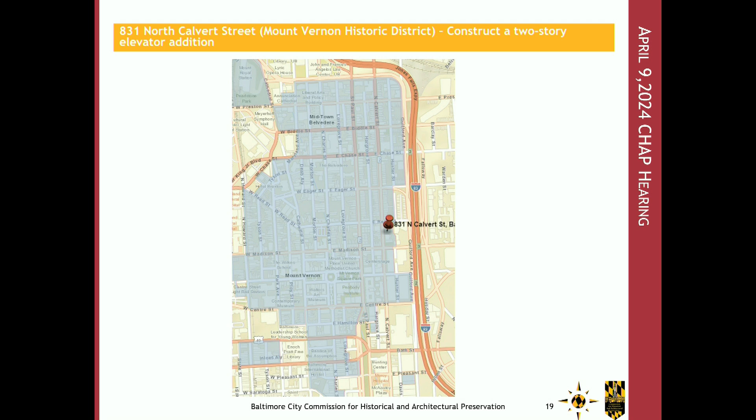This property is located in the Mount Vernon Historic District, which encompasses 40 blocks surrounding Mount Vernon Place. The period of significance for Mount Vernon Historic District extends from 1810 to 1945. The property is situated on the southeast corner of the intersection of Calvert and Read Street. It is a two-story firehouse which was constructed in 1908 for the Baltimore City Engine Company 16.

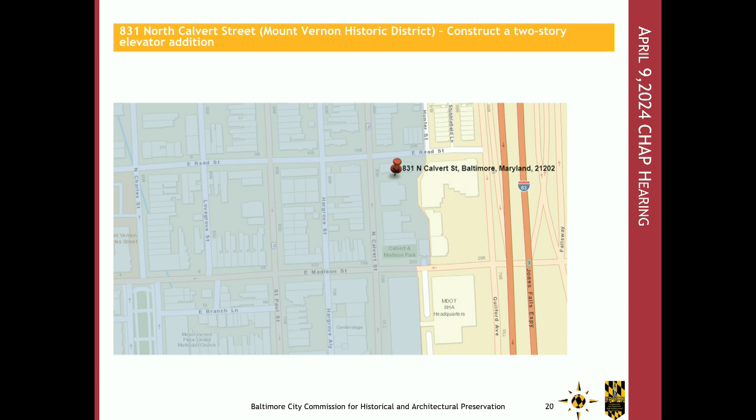Here are some aerial views from the west, south, the rear of the building, and north.

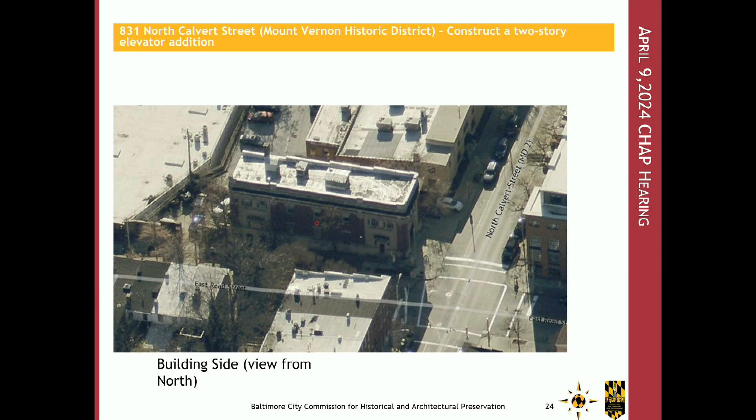The Calvert Street facade is a single bay with a large arch doorway which opens up to Calvert Street, surrounded by keystone molding which rises from the stone belt courses atop the stone foundation. On either side of the entry are massive two-story brick pilasters rising to a stone entablature. The second story houses three double-hung one-over-one windows resting at a single-story sill. An elaborate hooked ladder carving partially fills the space extending up from the keystone.

The south and east elevations are utilitarian with brick running bond on the south elevation. There is a two-story stairwell clad in EIFS, as you'll see in further pictures, with a curtain wall on the west elevation that faces North Calvert Street.

The stairwell is approximately 8 feet shorter than the firehouse and is set back from the facade of the firehouse about 30 feet. A mature tree is in front of the stairwell, which decreases the visibility of the stairwell.

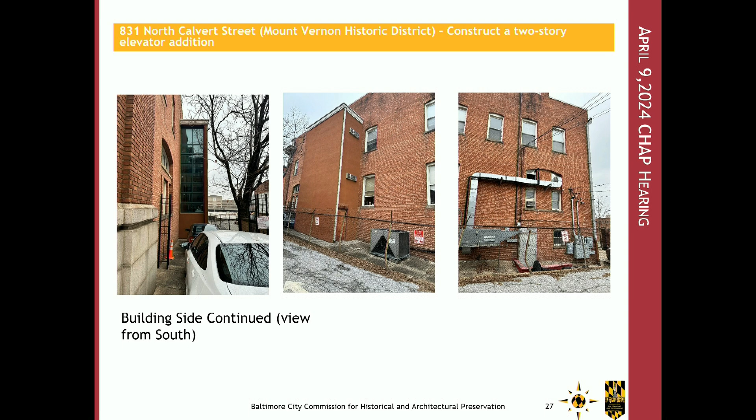The Read Street facade spans 5 bays. It's also a highly ornate facade. The end bays replicate the North Calvert Street elevation, but with less detailing. The middle 3 bays feature window openings on the first and second floor.

A little background: this property has undergone several reviews by CHAP staff and 2 reviews by the commission for various exterior work, including window and door replacement and mechanical work. Pertinent to this review, in April 2001 the commission gave concept approval of the exterior stairwell on the south side of the building, with colors and materials to be reviewed and approved by CHAP staff. However, there is no record of the final staff review, nor are there records in CHAP files or the permit system regarding the construction of the new stairwell or the EIFS currently present on the exterior.

The applicant proposes to construct an elevator shaft on the south elevation of the building. This elevator will enhance the accessibility of the existing 2-story building for occupants and visitors. The proposal is to construct the addition adjacent to the existing stairwell on the south elevation, built closer to the primary elevation of North Calvert Street.

The applicant explored constructing the addition on the other side of the stairwell towards the rear of the property, but doing so would significantly impact the circulation and remove several dining tables in the area on the interior.

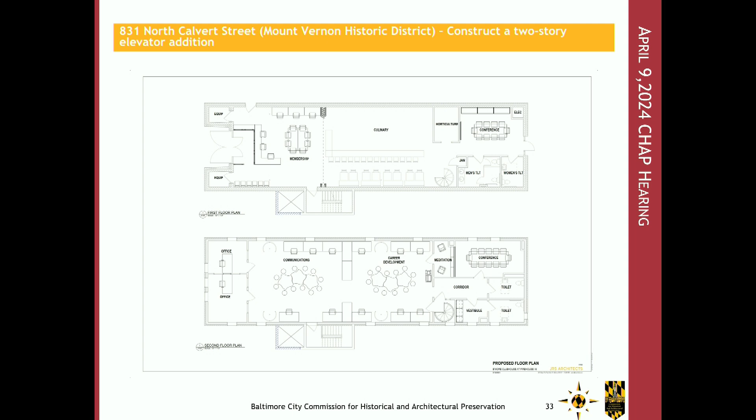The 2-story shaft will have a footprint of approximately 6 by 7 feet and will extend a few feet higher than the existing stairwell. The elevator shaft will be positioned on the side of the building adjacent to the existing stairwell, with a 6 3/4 inch inset from the original stairwell to accommodate the downspout that will empty onto North Calvert Street.

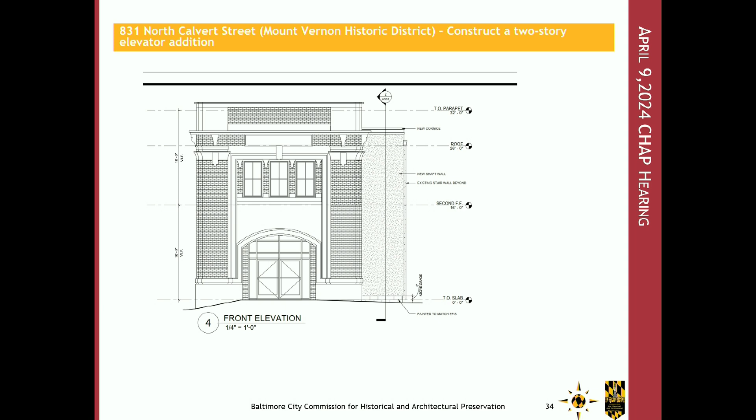The proposed elevator shaft will be concrete block clad in EIFS to match the cladding on the adjacent stairwell. There will be no windows on the new elevator shaft. It will be set back from the facade of the building by 24 feet, and it will have an EIFS cornice that replicates the existing simple wood cornice on the stairwell.

This is the proposed location of the elevator shaft. It's going to go in front of the current stairwell, and the windows and everything currently on the stairwell will be demolished.

Application of the guidelines: staff incorporated guideline 1.15, accessibility. The proposal meets the goal of providing barrier-free access to the upper floors of the historic building.

However, as currently proposed, the elevator addition isn't fully compatible with the historic character of the building in materials and detailing. While the guidelines recommend landscaping to screen elevators, in this case the construction of the elevator addition may necessitate the removal of a mature tree that currently serves as a visual shield for the existing stairwell. If the tree cannot be saved, the applicant will be advised to explore other landscape options.

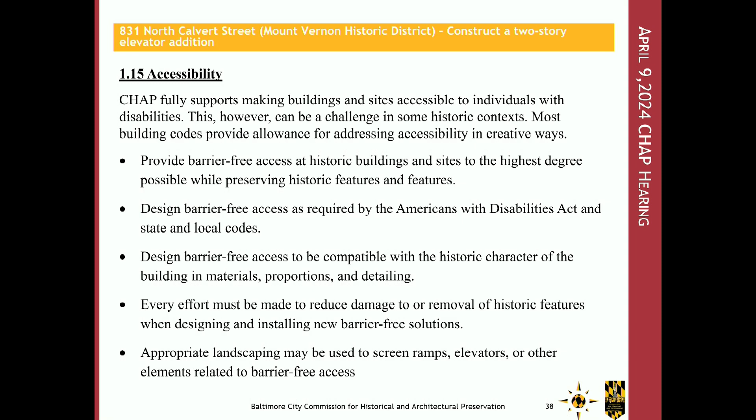Guideline 1.17, alterations and additions.

Excuse me one moment. Sweater—it's hot.

The proposed elevator addition largely meets this guideline, as it has a modest footprint and will be located on a secondary elevation.

This is a utilitarian elevator shaft lacking fenestration. The addition will be visible from the primary elevation, as it is set back only 24 feet from the primary elevation. It's largely compatible with the historic firehouse in massing, height, form, and scale, but would better comply with the design guidelines if it matched the width of the exterior stair tower. While the height of the elevator addition is not perfectly aligned with the cornice of the firehouse, this discrepancy likely won't be noticed given the setback.

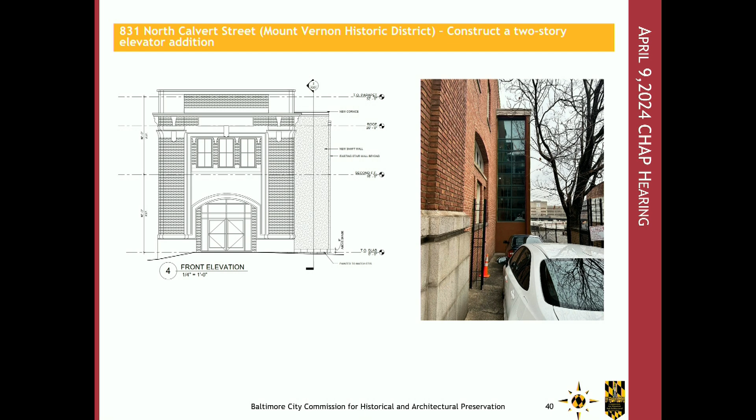Staff also applied guideline 2.1. The proposed addition could better meet the guidelines by adding some additional fenestration that visually relates to the firehouse, such as a cast stone base and a cornice that matches the height of the firehouse's cornice. Though it can be simple in design, the goal of adding these details is to break up the massing of the two-story addition by giving it a base, middle, and top, like the firehouse.

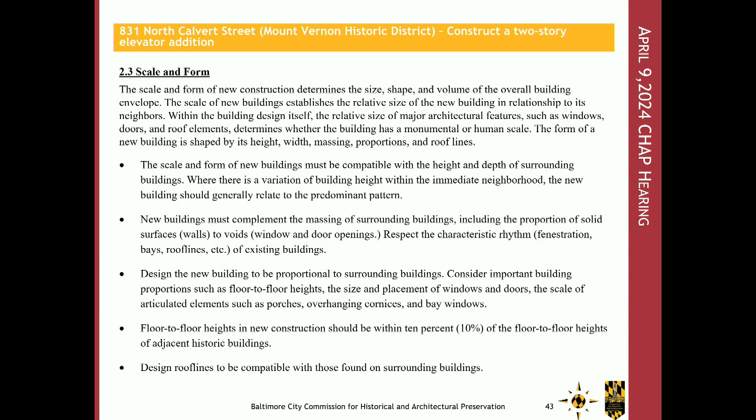2.3. The addition largely meets these guidelines as the scale and form of the new elevator shaft is subservient to the main building. It will better comply with the guidelines if it matched the width of the existing stair tower and if the cornice lengthened to be more with scale with the firehouse.

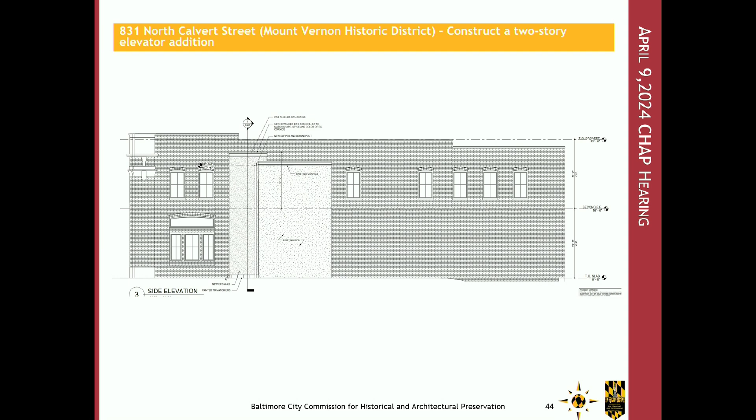2.5 materials. The proposed EIFS cladding does not comply with design guidelines. While the existing stairwell is clad with EIFS, there is no record of CHAP approval of this material. Additionally, it was constructed 20 years ago prior to the adoption of CHAP's current design guidelines. EIFS is not a traditional material within the historic district, and the use of it on an addition that fronts a primary elevation could detract from the overall historical character of the district.

Brick is the dominant material on this firehouse and in the neighborhood at large. Given the visibility of the proposed addition on North Calvert Street, staff recommends the addition should be clad with brick.

So, neighborhood comments. The ARC and the MVBA were presented with materials and plans, and their letter was uploaded to the Wix site, which I received yesterday.

So the analysis: the location, scale, and massing of the proposed addition is largely compatible with the design guidelines, though staff believes there are some necessary updates for it to fully be compatible. First, the addition should be widened to match the width of the adjacent stairwell as proposed, and the cladding and detailing of this utilitarian addition does not comply with the guidelines. The addition is visible from North Calvert Street, and thus requires more compatibility with the primary facade of the firehouse. This addition would better comply with CHAP guidelines.

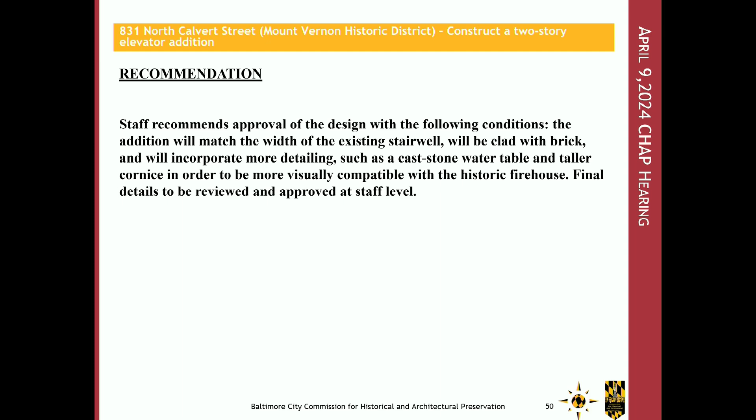Peter Bosworth. Yeah, I guess the three of us are together. Okay.

Hi, I'm Peter Bosworth, and I have listed myself as the applicant, but the real applicant is our nonprofit, Be More Clubhouse. I'm a volunteer there and on the board, so I put my name down so Anthony and I could talk over the last couple of months without confusion about where email or communication should go. Be More Clubhouse is a nonprofit that's been in the city about 15 years, and our mission is to help mentally ill adults.

We run a day program, meaning we're open from essentially 8:30 to 5, and we usually have 40-odd mentally ill adults in our program every day, plus staff. We've been operating in this building for about 3 years. We've been looking for a home in Mount Vernon really ever since we started 15 years ago.

We've always moved into sort of pretty bad locations, I'd have to say. We're a shoestring, bootstrap organization, and it takes a lot of volunteers like me and others to keep it going every year. We were lucky enough during COVID and some of the economic hardships to be able, with the help of M&T Bank, to purchase this building, which was in foreclosure. And we've been very happy there. Our members have been very happy there.

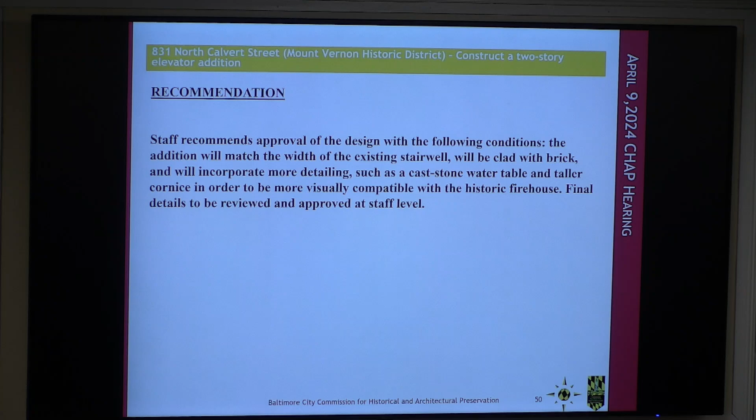Is there anyone else presenting for the owner? Unless there are questions for the program manager, I'm Al Barry, and I was helping Be More Clubhouse become established, initially in one location in Mount Vernon, which didn't work out because of cost. Then we found this building, which was perfect, and it's been a great addition, we think, to the neighborhood.

When we talked to the neighborhood, I haven't seen their letter, frankly. They did email us with some ideas, and we had some conversations, but as I understand it today, staff is generally in approval, but they're recommending brick versus EIFS, and because their guidelines don't recommend EIFS, we're before you.

We would ask you to approve our material based on the conditions at the site. We believe we can absolutely meet the guidelines, many of which staff has agreed to as well, and take into consideration that this is set back substantially from the street. It has existing landscaping, and your guidelines allow for additional landscaping if you would want us to do it. I think this is something we could work out with your consent with the staff.

Anthony's been very helpful. I think if you can approve the EIFS, we will add the water table, and we would propose it in brick, which makes sense. We can reduce the size of it or match the other one. But I agree that if you're going to look at adding something to an existing EIFS stairway, whether it was approved by CHAP or not, it's there, and it would be more jarring to introduce a third material there.

Are there any questions for Anna? Thank you. Thanks.

So I guess now, if commissioners have discussion regarding the proposal, I'll go first. So, a couple things.

In general, I'm not a fan of EIFS, but in this instance, I do think that introducing a third brick, no matter the attempts to try to get it to coordinate with the existing brick, would make it unduly complicated and look weird. I just don't think you're going to be able to get a match. So in this instance, specifically because it's already in place on the stair tower, in my opinion, it's one of the rare acceptable instances where it can work.

I do not see the point of trying to do something at the bottom for the water table, honestly, because while in elevation it reads off of the front facade, in reality, when you're approaching the building, unless you're looking straight on, you're not really going to see that because the side of the building doesn't have any kind of indication of a water table.

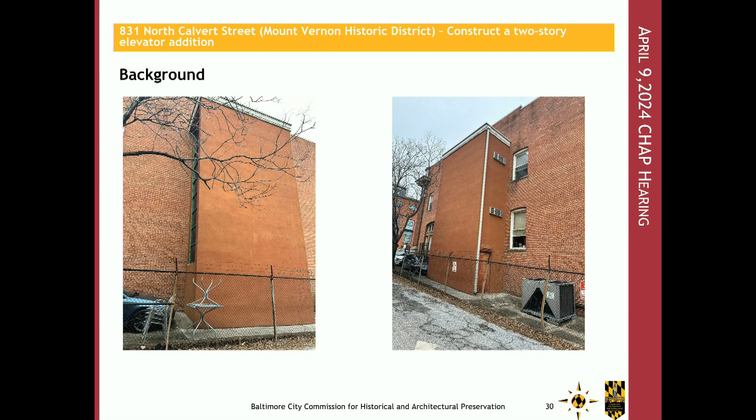So, where'd the photo go? Okay. So my point is, there's nothing on the side facade, and so if you just kind of stick something here, I think it would look pretty odd. So while in elevation it reads, oh hey, that's nice, but when you're experiencing the building in 3D, you're never gonna see that. So this kind of configuration, where there isn't something trying to mimic that, I think works for this instance. I don't know how others feel.

But the last point, which is the large flat facade, I do agree with doing something there. A large recessed rectangle or something like that seems to make sense to me, or breaking it up somehow. But I think that's all my comments.

Yes. Okay. Mike? It's some of the similar comments, but is your mic on? I'm sorry, yeah, it is on. Can you hear me? Can you hear me?

I think, in my opinion, typically when we're looking at additions, they should be simplified as much as possible and should try to create contrast between the existing building. So the existing building, obviously, is very ornate and wants to be sort of celebrated. So I think an addition that's on the secondary elevation, not a primary elevation, should not be detailed in such a way.

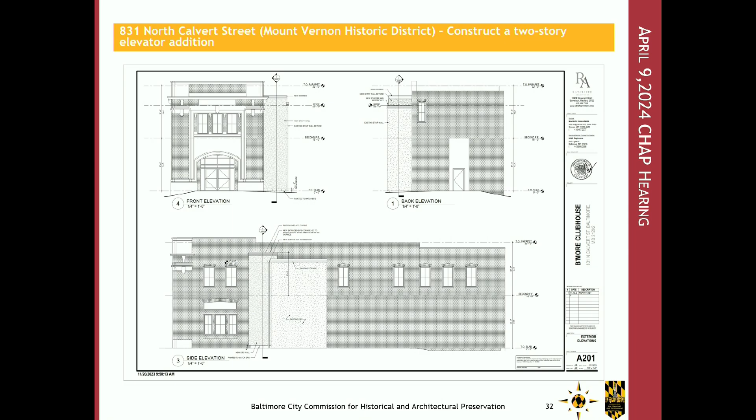Thank you. I agree with the comments that Commissioner Lynn and Powell made, so just to give a little detail there, you'll have to raise the stairwell parapet to match your elevator, most likely because your elevator is going to have a particular overrun height.

I think we can continue to work that out at the staff level. I just don't think that should be the tail wagging the dog. I was just trying to explain what makes it a simple box. We know the elevator overrun is what's driving the height of the elevator box, and that's going to be higher. I didn't mean they should lower it, but if they need to raise the stair, is it really worth the squeeze? That's fine.

Any other comments? I think the elevator volume, once you bring it out to meet the same width as the stair, you won't really see the lower stair roof behind there. I would think, just from a budget concern perspective, that it's not that critical.

Personally, Sarah was saying this too, we think it's a great brick matching color if that's the intent. I don't think we can really speak to say paint it one color or another, so I just don't want to opine on that too much.